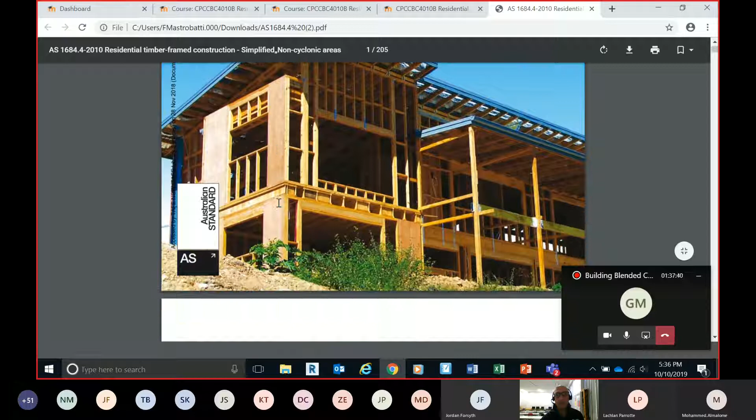And start building yourself a little information bank. Obviously these will always change, and you'll always be loading new ones up to make sure that they're relevant or up to date. So any codes of practice, any Australian standards as we're coming along, anything, any websites, stuff like that, you can just start throwing them in that folder and build yourself a good little tool there.

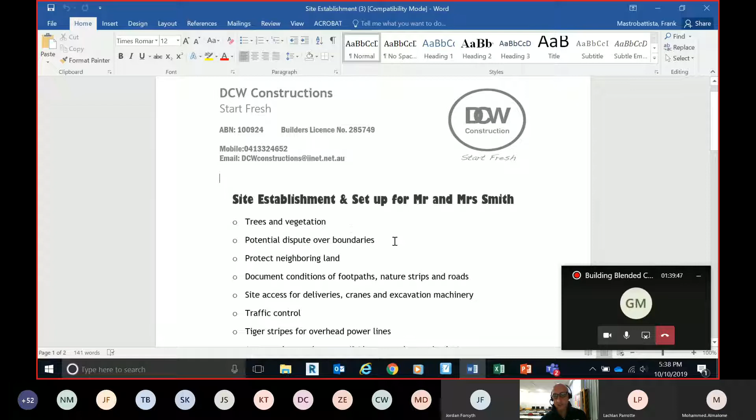So here we've got Dylan's, and he did a really nice job. Even the way he set it out, I thought was great. So he's got in there site establishment and setup. He's made a point of trees and any vegetation, because sometimes you've got to actually protect trees and vegetation.

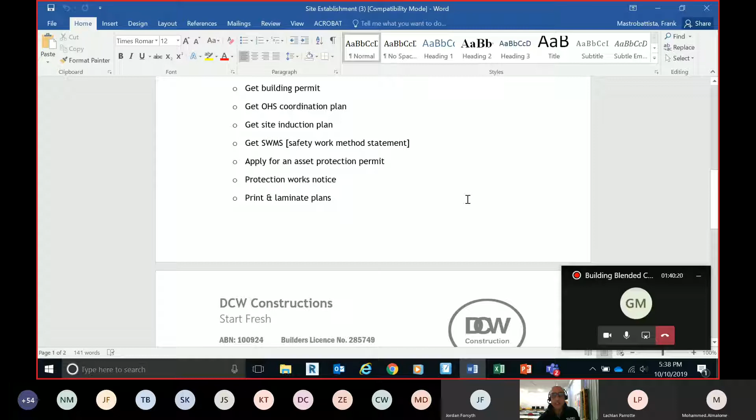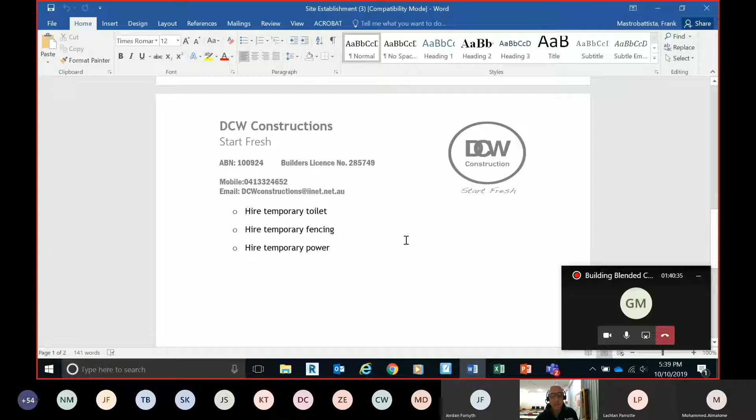What about boundaries and access to boundaries and so on? Protection of neighbouring land, all your documents, site access, traffic control, power lines, what security requirements, all the locations of his services, utilities, his signs, all his insurances, his OH&S, WHS, site induction stuff, make sure that paperwork's ready. And he's included a lot of, apart from the obvious, he's included the management side of it as well, which I thought was really, really good. So well done on that one.

There was another one that I thought was really good, and that was Brandon's. I hope you don't mind, Brandon, but I'm going to have a look at yours and show everyone. So this is another one Brandon's put in. What I liked about his was he's inspecting the site well before actually going out and doing any work, or even in the quoting stage. Okay, he's checking access for cranes and so on.

One thing I didn't bring up the other night, which I should have, I only thought of it later because doing a few jobs in the city, I remember doing one near Mascot Airport, and we ended up having to work in windows because our crane boom would come on their radar of their flight path. We were doing actual bridge parapets, working for a company doing the parapet walls over this bridge, and we had to apply, let them know when we needed the crane and when the boom would be up. So we only had certain time periods we could actually use the crane. Even in the cities, getting cranes to your job, there's only certain times they can be on the road. So you've got to make sure that's all organized as well.

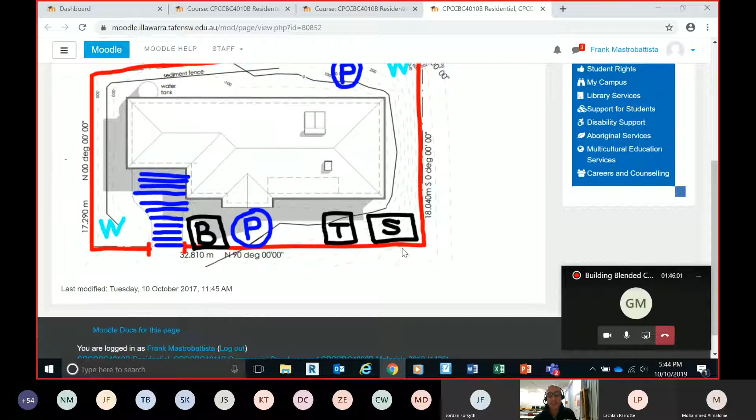So that's just a little example. If you guys drew something like that and loaded it up, took a screenshot or scanned it and added it to your document and loaded it up, that would have been brilliant as well. That would have been good. I haven't seen any of those yet, though. Okay.

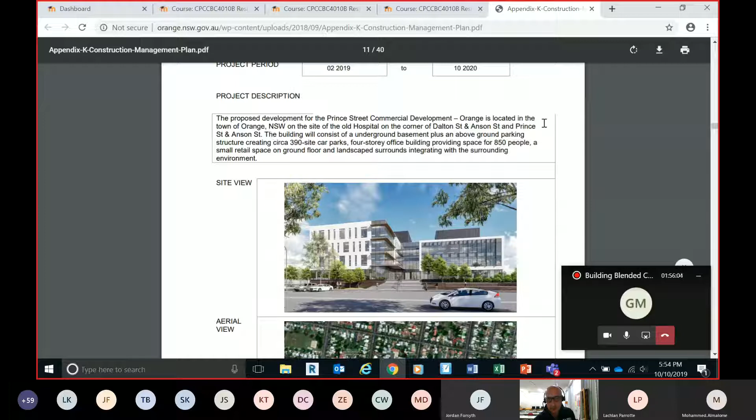So if we go straight to page 11, there's just a few things I want to point out. Here it is - you've got the project information. They've got when its duration is, so it's going from 2019 to 2020. It's got a description: proposed development for the Prince Street Commercial Development, Orange.

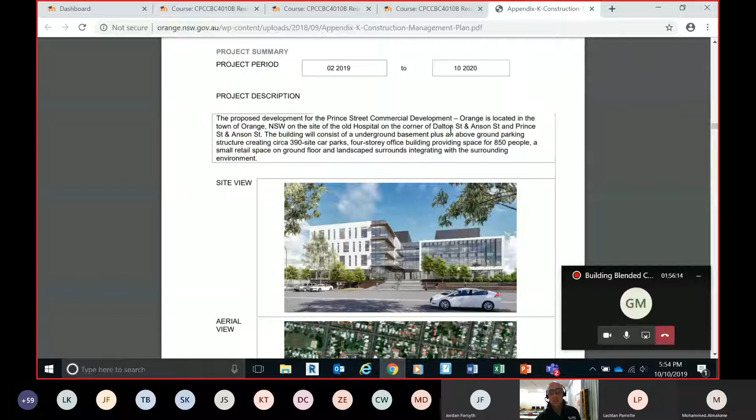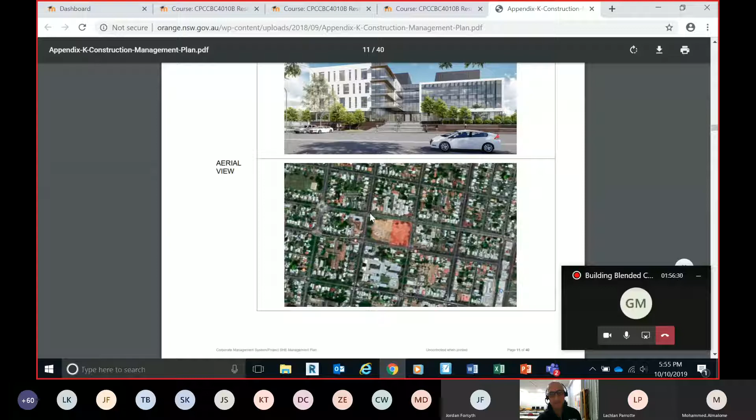It's where the old hospital used to be. Now you've got the site view, then you've got an aerial shot showing you how big the block is, the site is.

Then you've got your work hours. Monday to Friday, they'll be working from 7 till 5. Saturday, 8 till 2. Sunday, no work. But if you read the fine print, it says if they have to work Sundays, they'll be putting in applications and so on. You've got all your project contacts and so on.

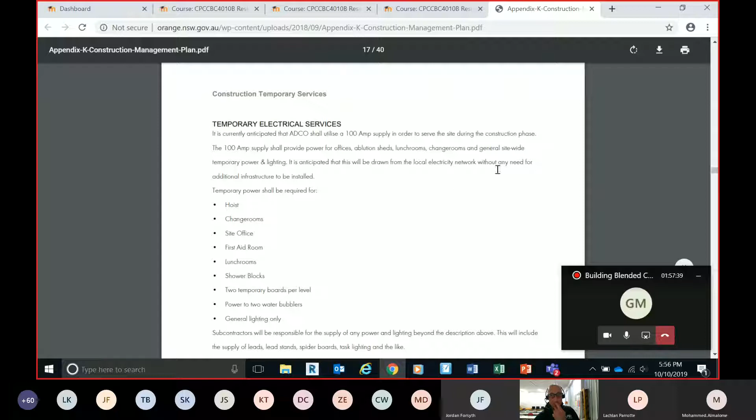We'll go to the page - there's some more stuff that's pretty relevant here: temporary services, temporary electrical services. They even do estimations on how much power they're going to use - 100 amp supply in order to serve the site during the construction phase.

So it's going to provide power for the offices, the sheds, lunchrooms, change rooms, generally site-wide - temporary power where you're going to need it. Hoist, site office, and so on.

You've got your communications, telephone - it's a very big commercial job, so they're important. They're going to have all their laptops. They'll need all the internet and so on.

Then it goes on about their potable water, so it's got to be clean drinking water, where they're going to need it. They'll need it in these areas.

Change room, site office, the first aid room, lunch rooms, the shower blocks - they want 2 water bubblers. They've got a wheel wash water at the gates, there's an EPA requirement. So they'll need hydrant coverage - fire, in case of a fire.

Then they've got all their sanitary drainage, their sewerage. What are they going to do with their stormwater?

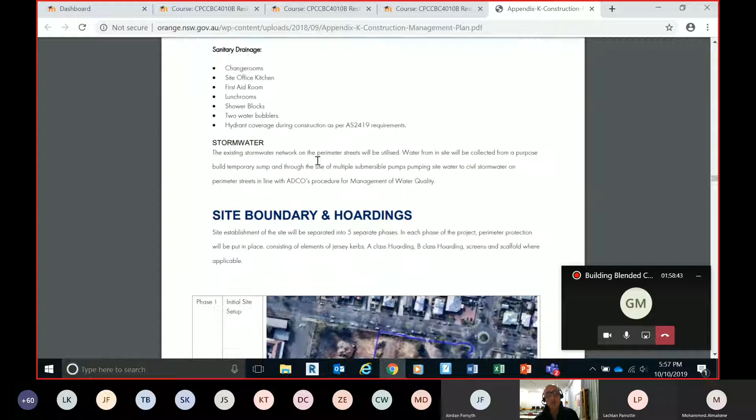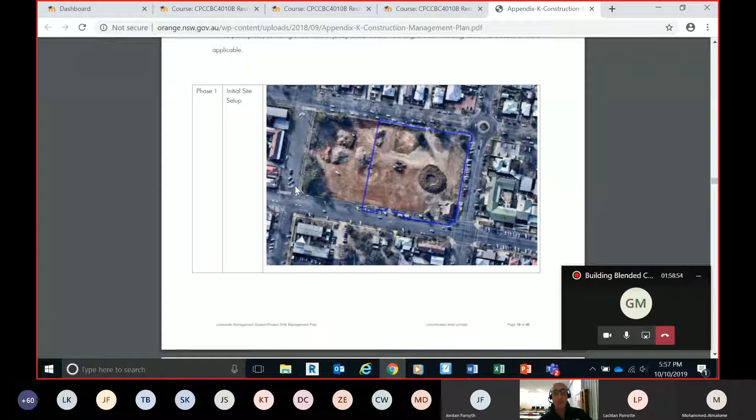Then they show their site boundaries and hoardings, just showing it with a blue line around the job where they'll be setting up their initial site setup.

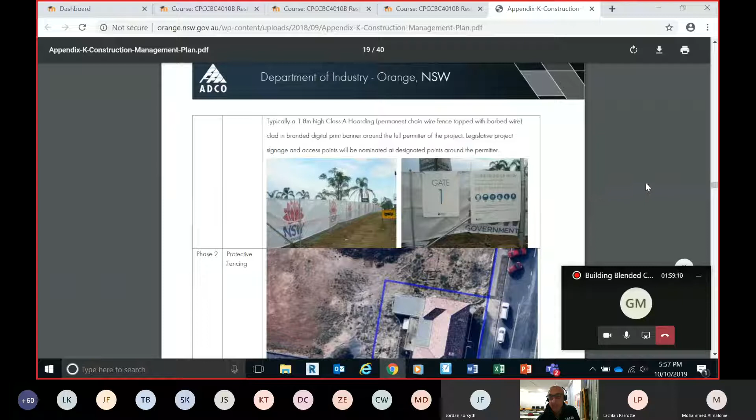And then they go down and show their signage on their gates, how they're going to cover it with shade cloth, how they're going to actually control dust and so on.

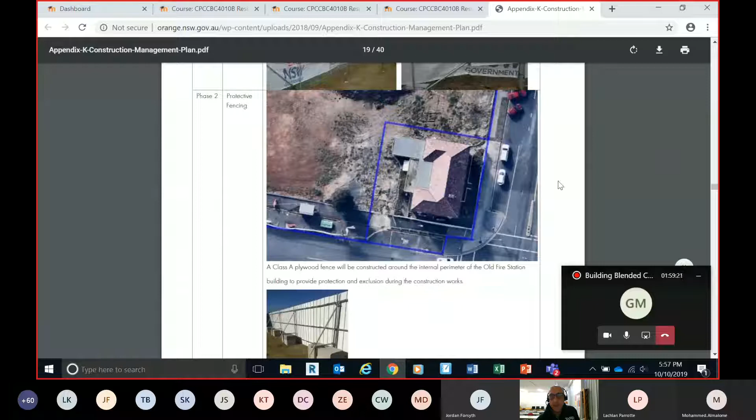Then there's an existing building, so they're going to put up a plywood fence around it so they can protect that. It's got a picture of how they're actually doing that - over here we've got some type A class hoarding and how they're actually fixing it into position.

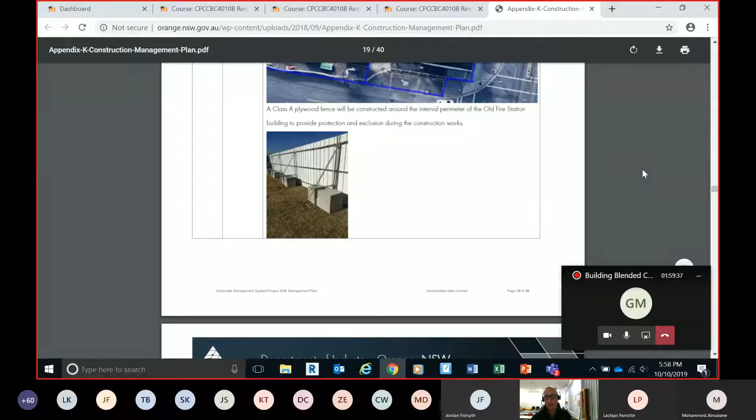You've got your site access. It goes through, and because it's such a big job, they'll have their gates numbered - gate 1, gate 2, and so on. That's really, really handy, because on jobs that big, you're going to get a lot of materials delivered, and you're going to need to tell the suppliers, whoever's delivering, or even the trades, what gate they're going to have to move into, they'll be driving into.

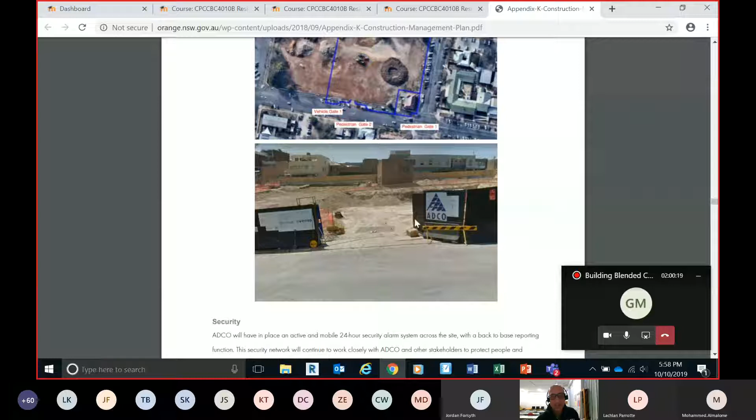So here's some more - here's the access gate. It's a closable, open or closable, lockable gate which they can use. You've got your security - they're going to have 24-hour security.

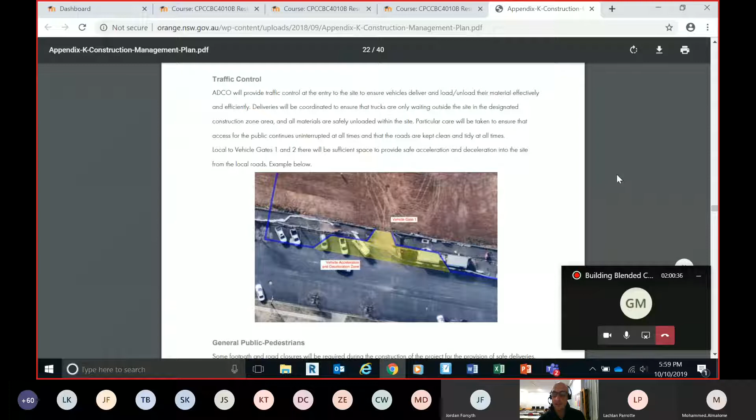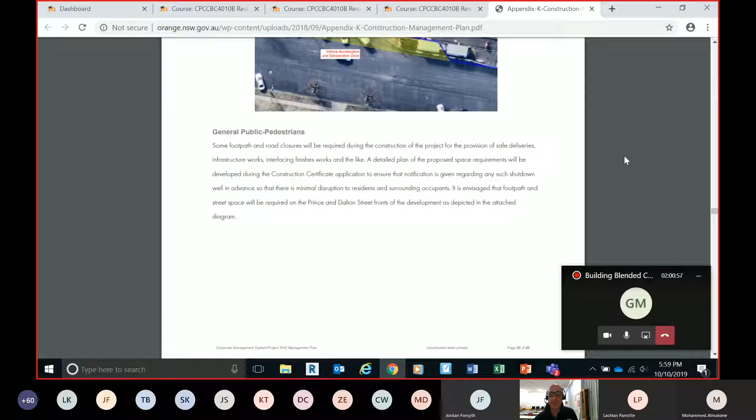Traffic control - they've done their traffic control plan there. Now, general public pedestrians: some footpath and road closures will be required during construction of the project for the provision of safe deliveries, infrastructure work, interfacing finishes works and the like. So they're saying they're going to put in a detailed plan of when and how they're going to manage it.

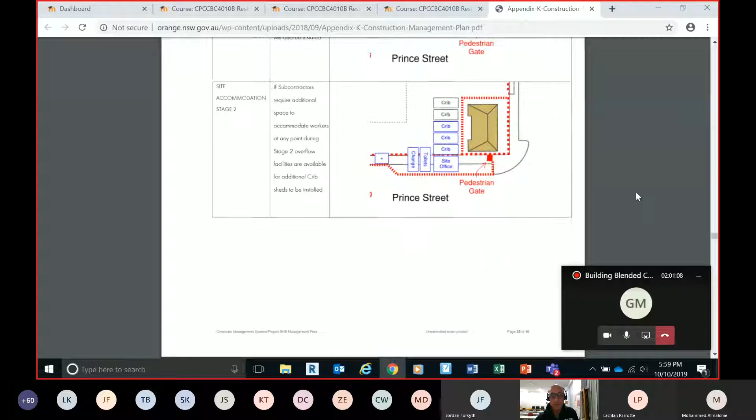And here we've got a traffic management plan. So they've got a manual prepared during the detailed planning phase. A full consultative approach will be undertaken, working closely with council, adjoining property owners. There must be TAFE, RMS, bus company services provided.

The traffic and pedestrian management plan will ensure the following are implemented during the construction period: full operations and access to adjoining businesses, full access to service infrastructure during construction, maintain full access to the roads and maritime services infrastructure, maintain bus services and so on. They don't want to cause any problems to any of the services running around the construction site, and they want to make sure they keep it as safe as they can.

There's just one more thing on this document that I thought was pretty good. So, procurement and mobilisation. Prior to construction works, ADCO will implement the following, and it goes through everything that they will be putting in place before they start.

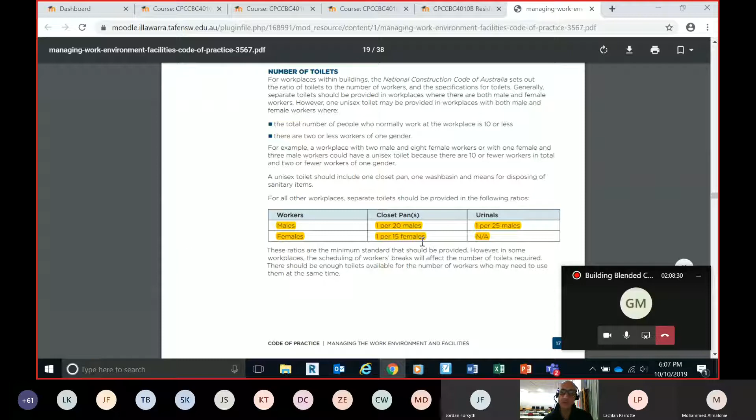Okay, urinals 1 per 25, females 1 per 15, all right? It even tells us the number of hand washing basins needed here. So we're going to need 1 basin for every 30, okay?

Mobile, temporary or remote workplaces, access to dining facilities for workers in remote areas such as loggers or mining exploration workers may be limited. At times, the only enclosed facility available to them may be their vehicle. Now, we all can relate to that, okay? And it says here, in this instance, portable food storage facilities may be required, such as a car fridge or insulated lunchbox. I was blown away last year by everyone's car fridges and how high tech they were. And my guys had solar panels on their trailers that they were using to run them and stuff. It's just unbelievable, like how far it's all come.

Okay, it's really, really changed from when I was doing my apprenticeship and so on. Okay, so change rooms. If male and female workers need to change at the same time, separate male and female changing rooms should be provided. Okay, and this is interesting. We need at least half a square meter for each worker, all right, so that's how they base the size of their change rooms.

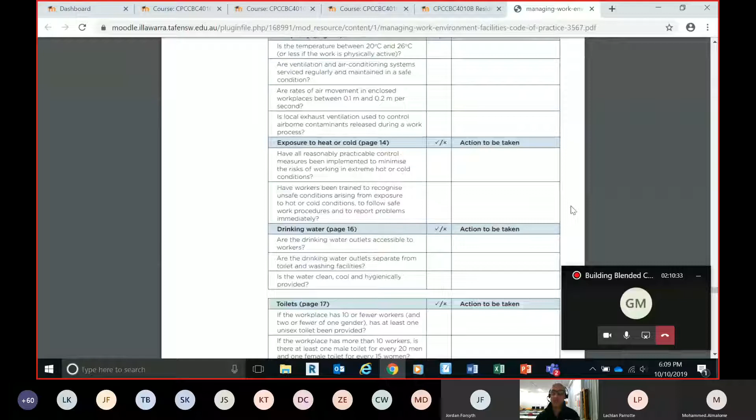That's when things do happen, and just say something ends up happening, WorkCover comes on and they have a look and they ask you questions why you haven't done it. The days of saying, well, I just didn't know, you can't sort of use that as a defense anymore. That's why all this stuff, and that's why there's basically a code of practice or a standard on everything you want.

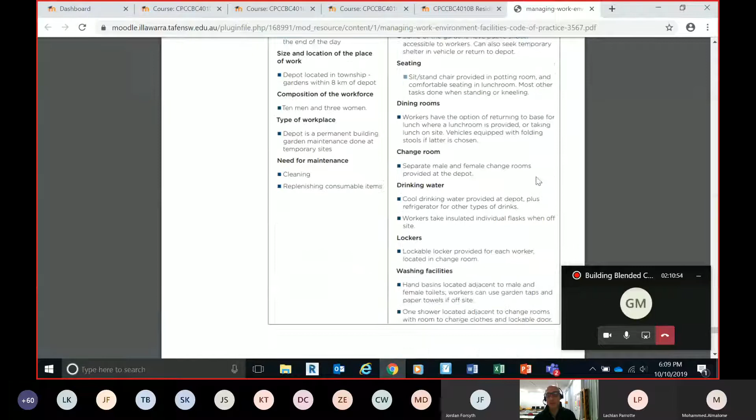Okay, all you need to do is type in what you're doing and what kind of a code of practice you're after, and pretty much guaranteed one will come up.

All right, so there's a quiz here on site establishment. What I'll get you to do, just refresh, guys, and open that quiz up and answer that question.

It's a 1-question quiz. When establishing a building site, there are certain facilities, amenities that should be put in place. Select from the following the items that you believe fit that criteria. So you can select more than one, obviously.

All right, signage detailing builders' contact details, emergency contact details - we know by law that we need to have that sign up, it's a legal requirement. Storage area for deliveries, yes. Water, yes. Waste bins, yes. Security fencing, yes. Toilet facilities, yes. Site access for deliveries, yes. So we know that we can basically tick every one of those, okay?

So remember, with the hoardings, Class A, guys, so our Class A hoardings are basically perimeter, secure perimeter fencing up to a height, okay, probably 2.4. And those are made out of timber, plywood, sheets with a steel or timber frame, okay. So the main purpose is to make sure that no unauthorized personnel can get in, okay? And they also provide a benefit by reducing the impact of noise, dust, waste flying out of the job into the surrounding environment. Okay, and our Class B hoardings, they're really, really important for project managers and people managing the job.

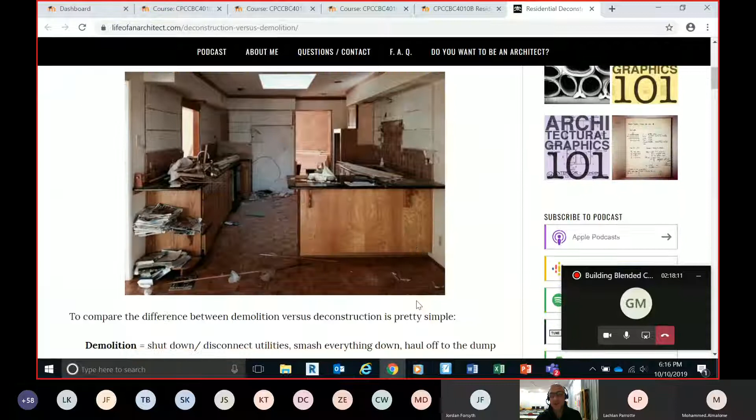So here we've got an example. There's a URL up there, deconstruction versus demolition, and it tells you all about it. Now, obviously, your demolition is probably less labor - it requires less labor, and your deconstruction is going to be more labor intensive. But what you lose in your actual labor hire, you're hoping to make up in using salvaged items or selling them, okay.

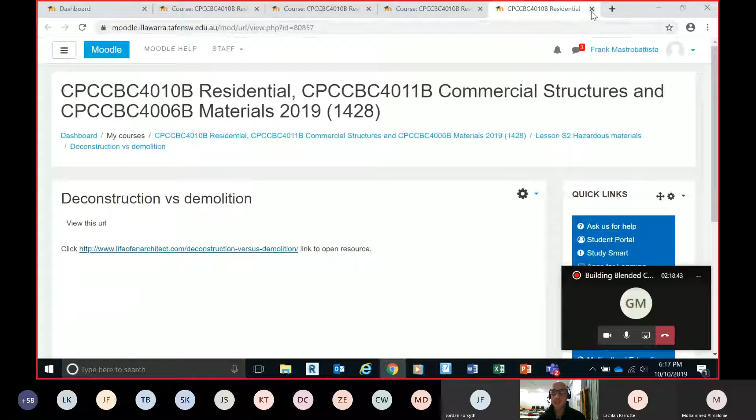So what we'll do, I'll open this link here. So we've got a YouTube deconstruction video link. I'll get you to watch this.

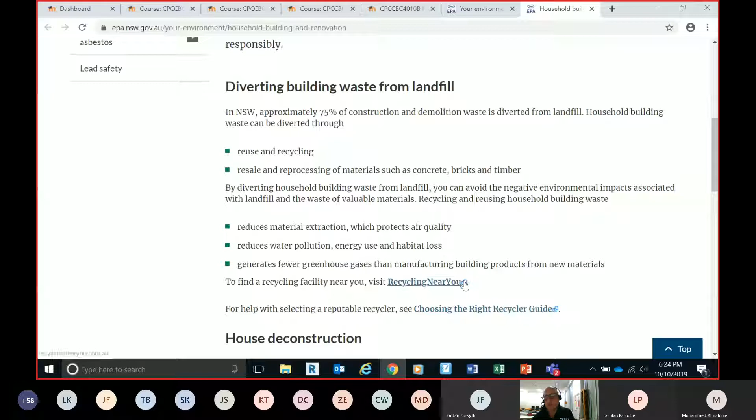So what they're trying to do, they're trying to encourage everyone to recycle and reuse as much of demolition waste as possible, okay, or try and sell it. So what they're trying to encourage everybody to do is recycle, reuse and repurpose as much as we can from an actual house deconstruction.

Obviously you're using less energy in trying to produce those materials over again, okay? All right, and there's a lot of good material in this actual website.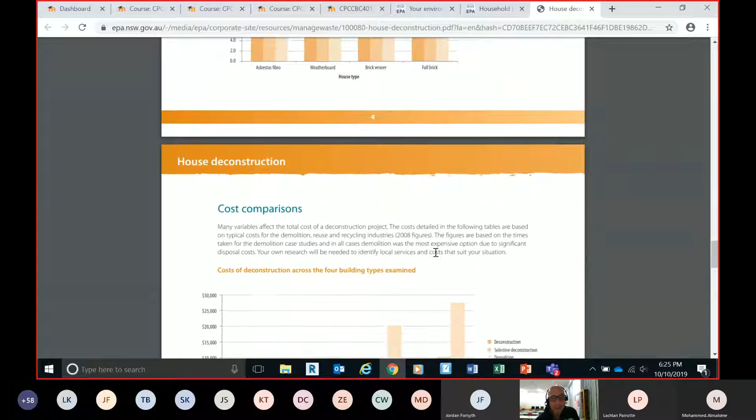You've got your house deconstruction booklets, okay? These are all things that you can actually put in your little folder, like what we showed you at the beginning of the lesson, okay? And it's got some cost comparisons, all right, between demolition and deconstruction, all right, which I was having a look at before and it surprised me, all right? So there's a lot of really good information in this, and it's a good tool to keep. Good resource.

You've got Wollongong's actually got its own recycling centre, and even here where we are, we've got certain parts of our landfill now that are totally committed to recycling and repurposing, all right? So the first thing they do when we go in, they ask us what we've got, and they'll tell us where to go. If it's something that they deem to be recyclable or reusable, they'll send us in the direction of these waste bins that actually go to repurposing and recycling places.

So the Wollongong Recycling Centre - what you guys in the Illawarra have got is your own. Okay, so it's basically, it'll manage all your waste removal, okay? You've got your waste management.

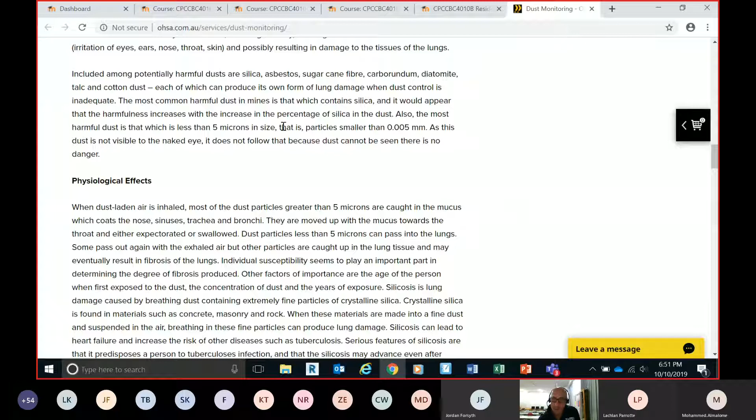So now there's an actual code of practice on dust and how to manage it, okay? Here we've got, among potentially harmful dusts, silica, asbestos, sugarcane fibre, carborundum, diatomite, talc, and cotton dust. So the most harmful dust in mines is that which contains silica, which we're around as well. And it goes on to tell us the most harmful dust is that which is less than 5 microns in size, that is particles smaller than 0.005 millimeters.

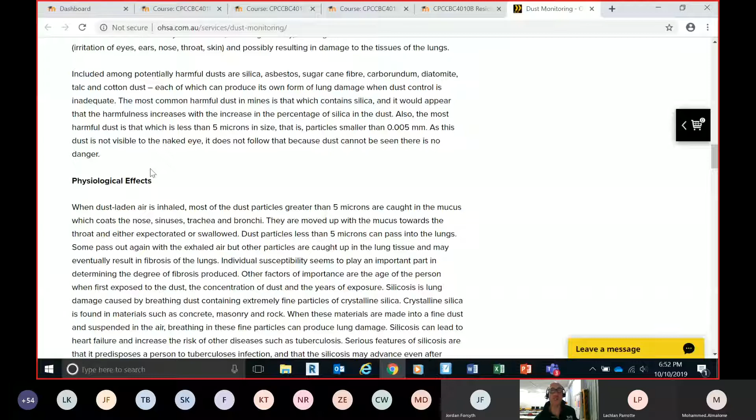This dust is not visible to the naked eye. It does not follow that because dust cannot be seen, there is no danger. So we know that in our industry, we're around dust all the time.

Another thing that worries me about what we're doing is now with all the timber framing that comes through, all the timber framing that's treated, the green and the red - if you look at their paperwork, they're screaming to tell us to make sure we're wearing gloves, personal protective equipment, and everything like that because of the effects. If we're breathing in that sawdust, cutting it on our drop saws for the wall framing, and we're around it every day doing a lot of it, well, if we're not wearing the right PPE or looking after ourselves, down the track that's when it'll all come up, okay?

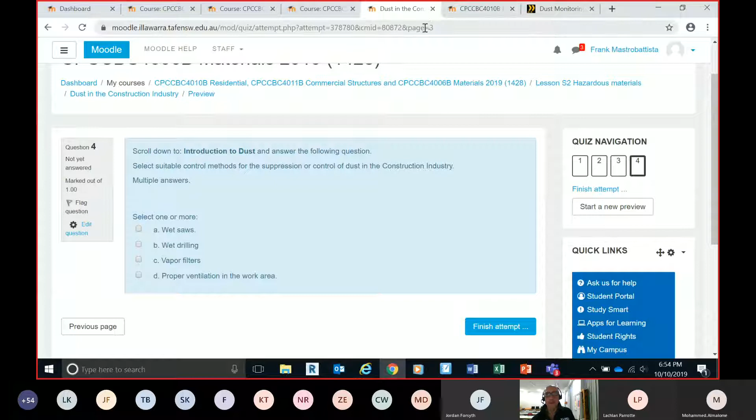All right, so we get into asbestos.

So there's a forum here. Explain in the forum your definition of asbestos and what is the difference between friable and bonded, okay? Just put in there, I'd like to see what your answers are. What's the difference between friable and bonded, and what is asbestos?

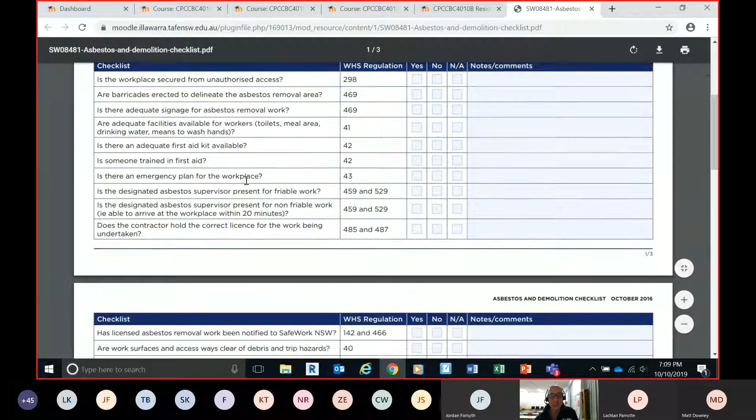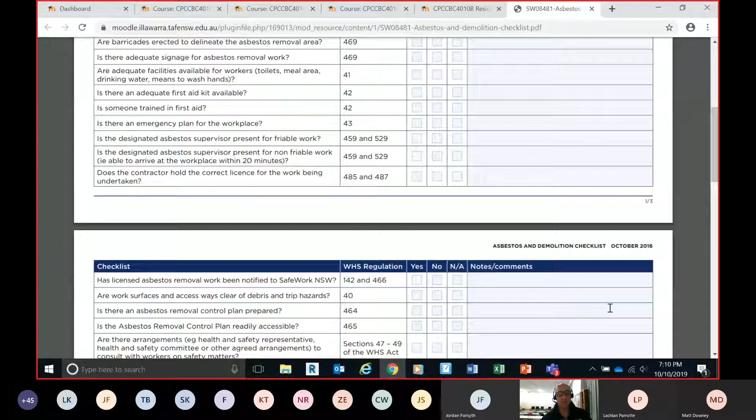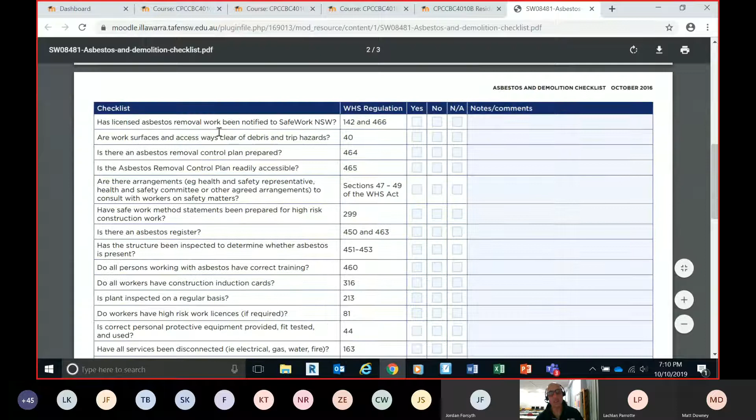Is it secured? Are barricades up? Is there enough signage? Are the facilities for the workers there? Is there first aid amenities? Is there someone trained? Is there an emergency plan? Is the designated asbestos supervisor present? Does the contractor hold the right licenses and so on? Okay, you've got a whole checklist there.

This is another document that you can put in your folder, and there's a lot of this stuff in here that you can use. It won't only relate to your asbestos removal, it'll relate to other things when you guys are building and making your management plan, fine tuning it. Remember, these documents are living documents, guys. You're going to be working on them all the time, customizing them for whatever job you're doing and for your business. They're really, really good to use to help you out.

Hazardous materials in the demolition of a 1920s house. This is another forum question that I'm going to get you guys to answer, and this wouldn't be far off from what you're actually probably going to get faced with. So you're a contractor, you've tendered for a job to refurbish an empty, derelict 1920s brick house. It's double brick, got lime mortar, rendered internal walls, a tin roof, metal roof, and it's in a suburban, built-up area. The work involves replacing all timber framework, so you've got to change all the bearers, joists, timber floors, ceiling joists, rafters, etc., and associated works.